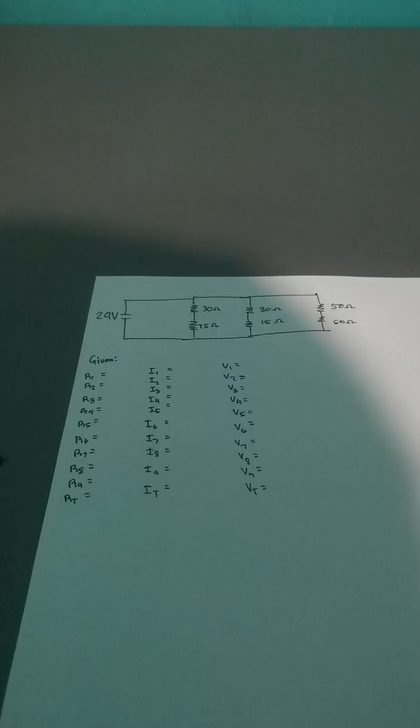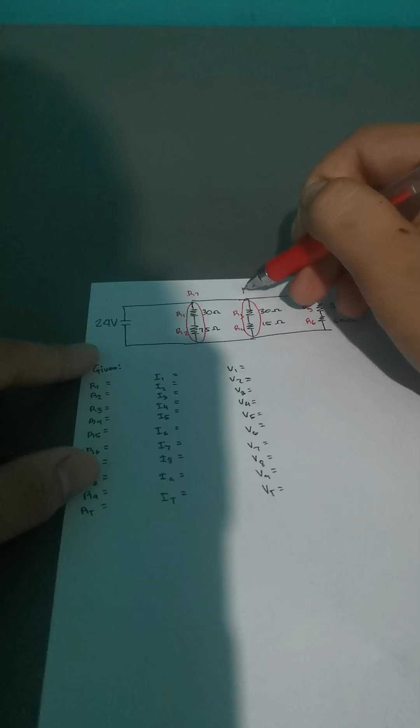Okay, so subong ma-solve the series parallel ng circuit. Pero ang given tanan is resistance. So if may encounter mo ni, ano himuon mo? First, i-identify mo anay ang resistors. So this is R sub 1, R sub 2, R sub 3, R sub 4, R sub 5, and R sub 6. Pero, ang amo niyo is R sub 7, R sub 8, and R sub 9.

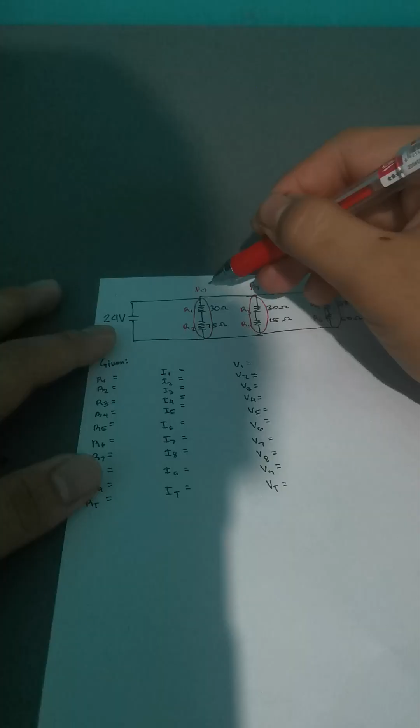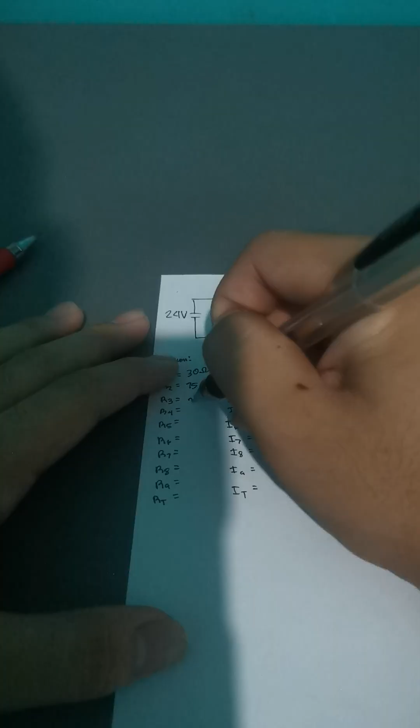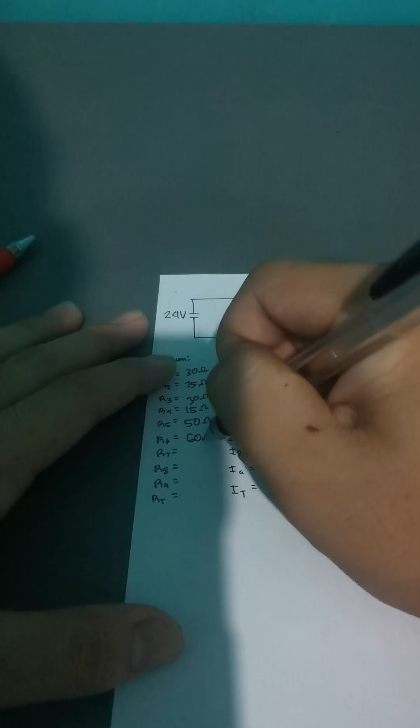So, wala ni kat-kat, diretso lang yun eh. So, consider mo ni sila resistors. Kay ang resistor 1 kag resistor 2 ara sa resistor 7. So, isa na yung given. R sub 1 is 30 ohms. R sub 2 is 75 ohms. R sub 3 is 30 ohms, R sub 4 is 15 ohms. R sub 5 is 50 ohms. R sub 6 is 60 ohms. So, isolve ta ni ang R sub 7, R sub 8, and R sub 9.

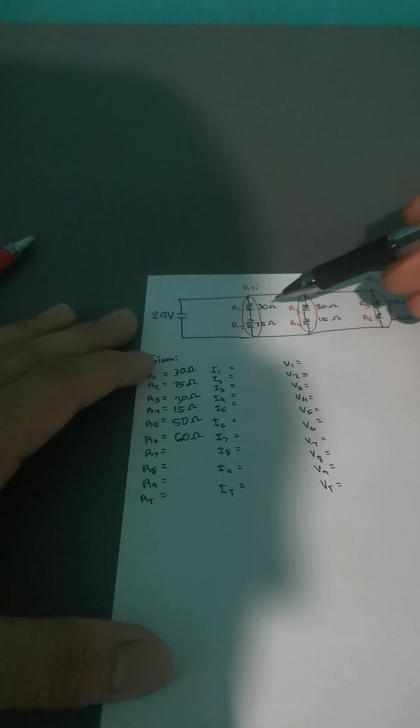So, paano ito na-isolve? Isolve ta kay series parallel circuit ni sa. So, in respect to each other, series ni sila. Pero, in respect to R sub 1 and R sub 2, you can consider this a series circuit. But in respect to R sub 1 and R sub 3, you can consider them parallel to each other. So, isolve ta sila anay.

So, resistance. Oh my gosh, wala. Spelling. Tulo ko sa camera. Okay.

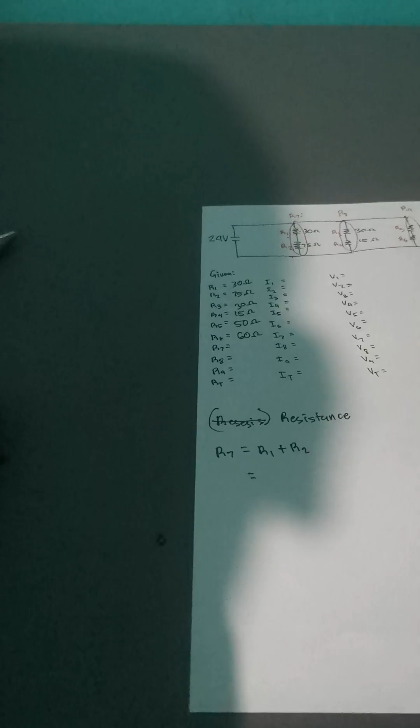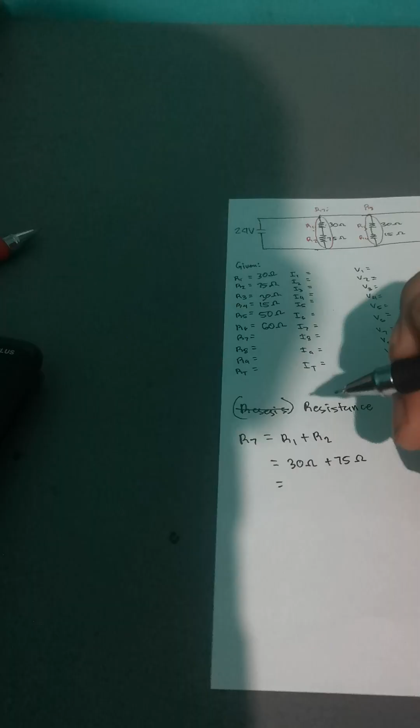So, let's solve for R sub 7. R sub 7 is R sub 1 plus R sub 2. Amo lang gina kung paano mo i-solve. So, 30 ohms plus 75 ohms. That will give you 105 ohms. R sub 7 is 105 ohms.

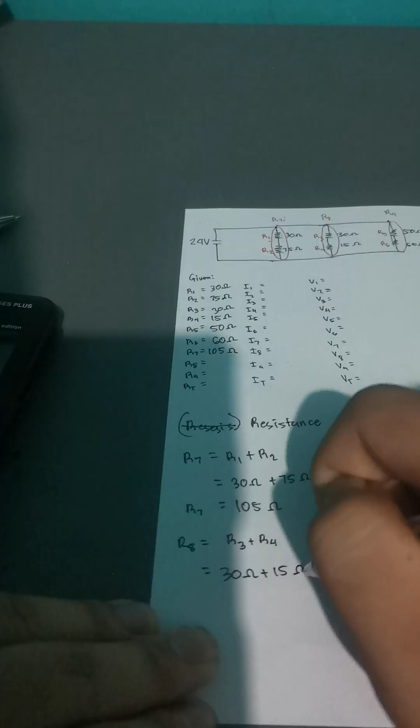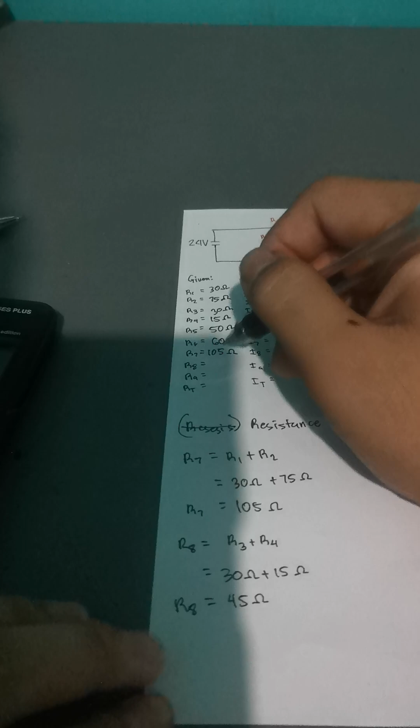Now, let's proceed to R sub 8. R sub 8 consists of R sub 3 and R sub 4. So, R sub 3 plus R sub 4 is equals to 30 ohms plus 15 ohms. That will give you 45 ohms. So, R sub 8 is 45 ohms.

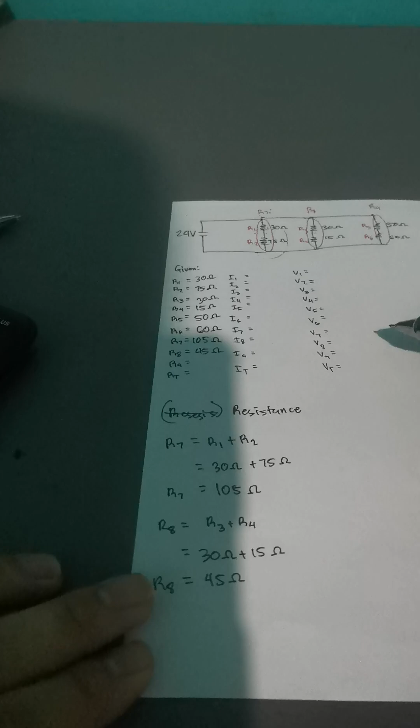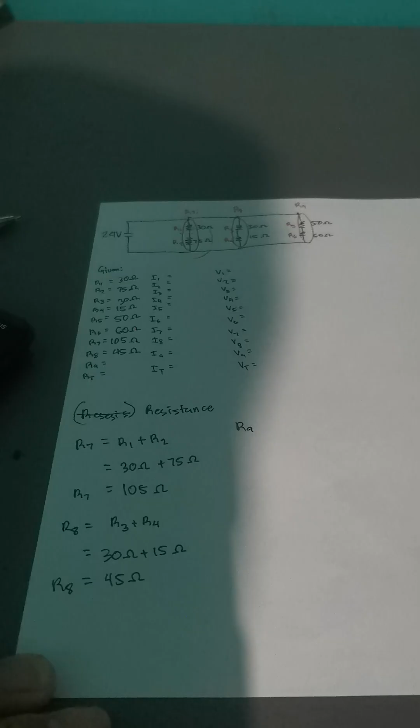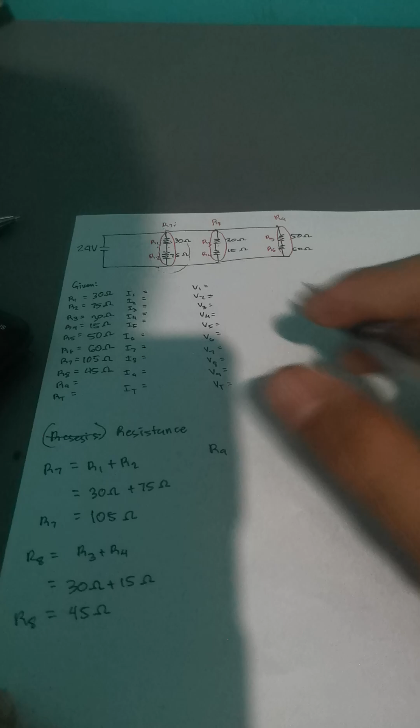Let's proceed to R sub 9. If given, syempre ang resistance, masolve tas ang resistance first. Pero, para better intindihan mo gid if ano ang kulang, ibutang mo na yung given. Depende if ano ibutang, either voltage, current, or resistance. So, in this case, resistance na lang ang given. So, resistance man isolve mo.

So, R sub 9 is equals to R sub 5 plus R sub 6. R sub 5 is 50 ohms. R sub 6 is 60 ohms. That will give you 110 ohms. R sub 9 is 110 ohms. So, after ni, masolve ta for total resistance.

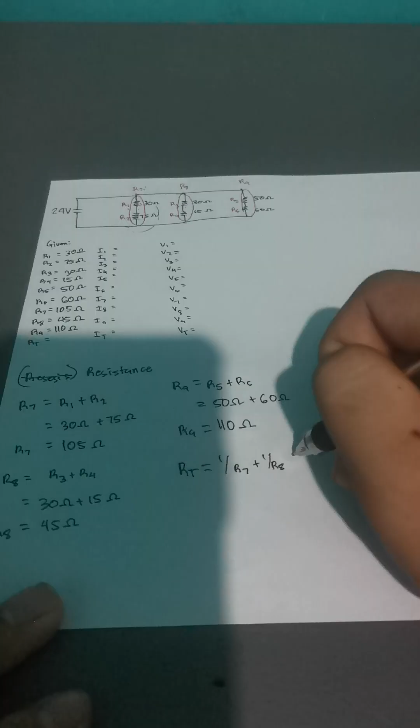So, 1 over R sub 7 plus 1 over R sub 8 plus 1 over R sub 9. Amo malang ni need mo i-solve. Kay, for example, R sub 1 and R sub 2 will make up resistor 7. So, resistor 7, resistor 8, resistor 9. Hindi mo na pag-ibutang nga 1 over R sub 1 plus 1 over R sub 2. No need na magbutang. Like, 1 over R sub 7.

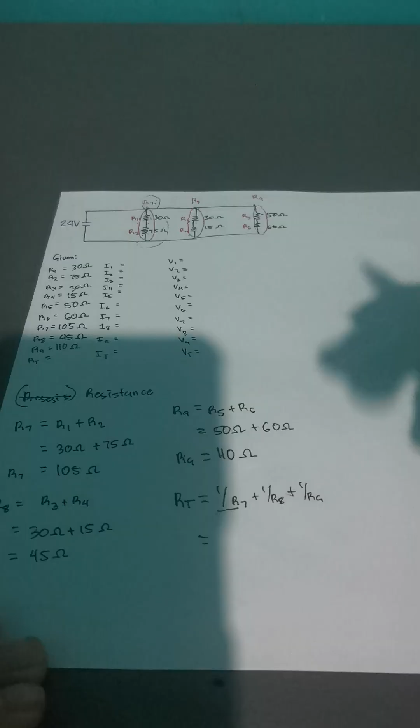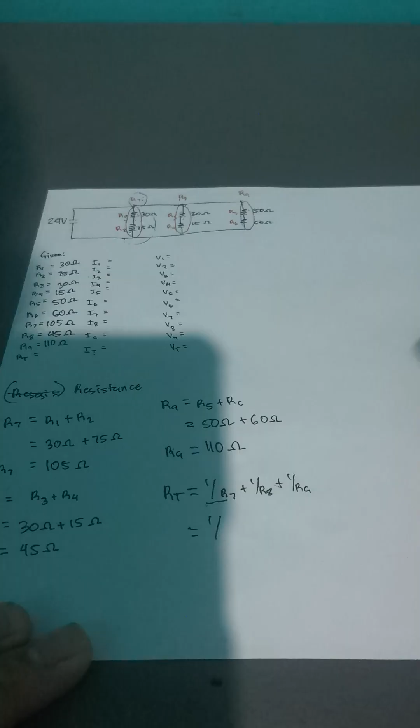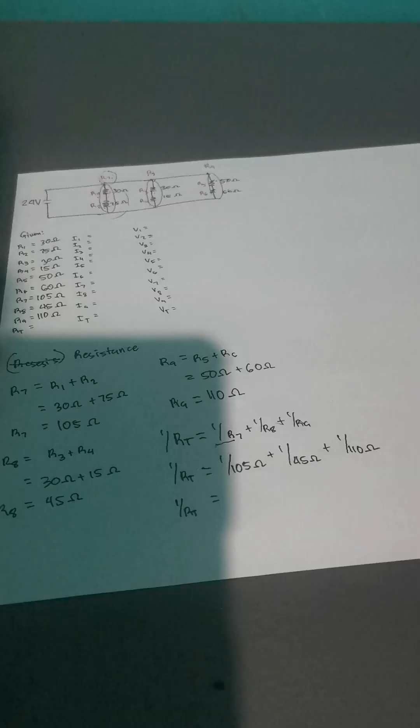Okay, so 1 over R sub 7, 105 ohms, plus 1 over R sub 8, 45 ohms, plus 1 over R sub 9, 110 ohms. So 1 divided by 105 is 9.5 times 10 raised to the power of negative 3. Ma-move ka 3 spaces to the left. So 0.009.

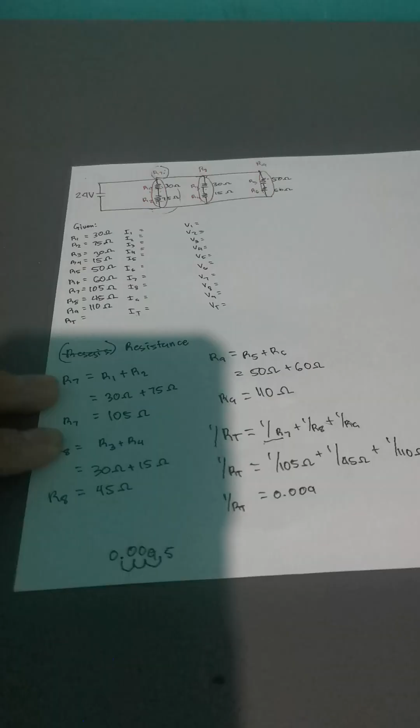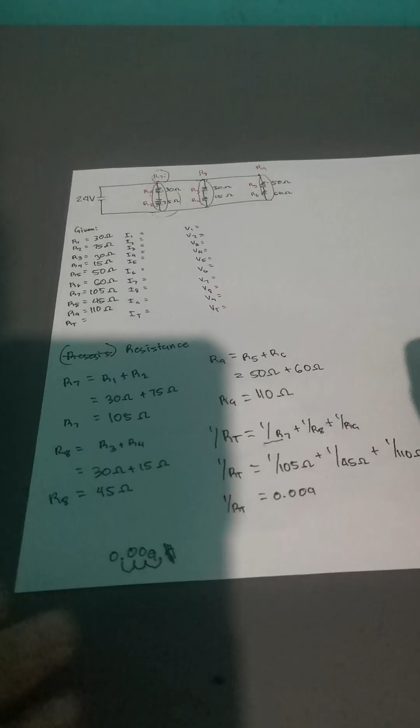Wala na ng 5, i-discard na. Sorry. Sorry, may 5 pa na di. Oh, wait. Yeah. I know.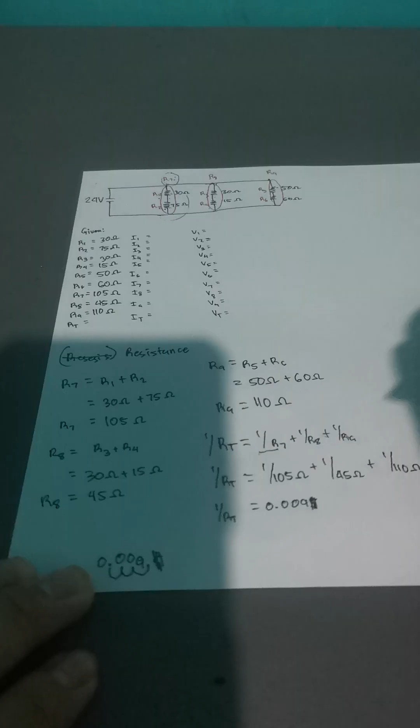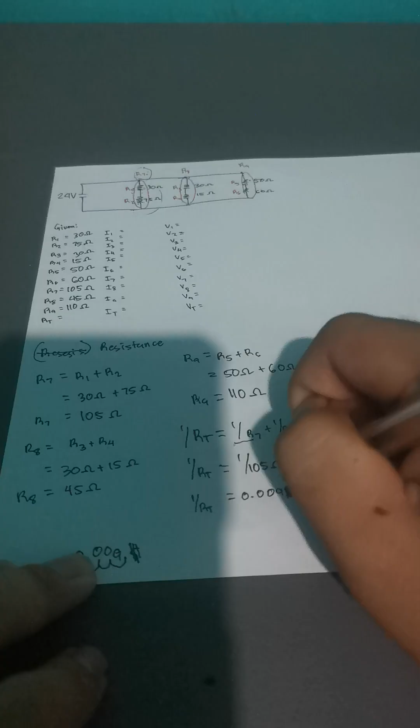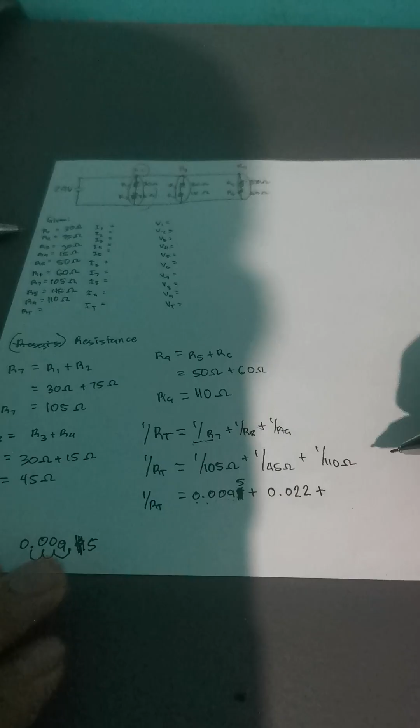So, plus 1 divided by 45. That will give you 0.022. Oh yeah, may 5, so 0.0095. Then there is 0.022, plus 1 divided by 110. That will give us 0.009. Ma-round up ta kay 9 ang tupad ya. So 0.0091. Siyempre butang ta unit which is ohms.

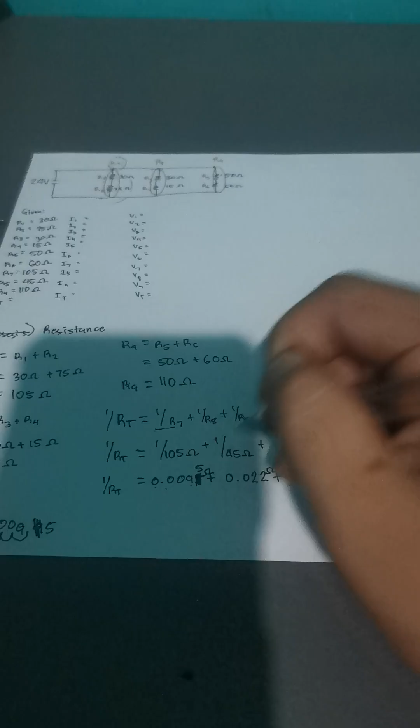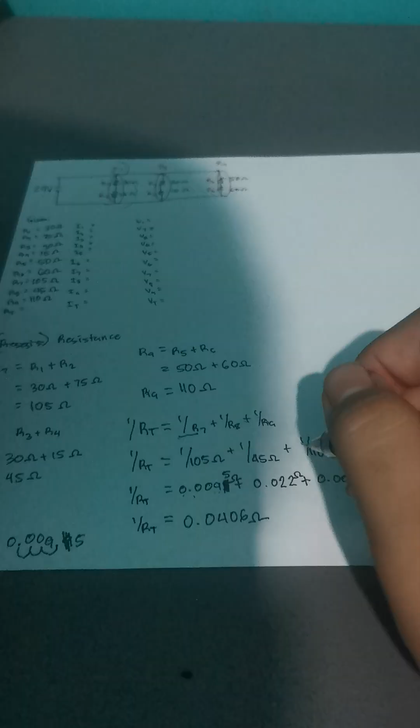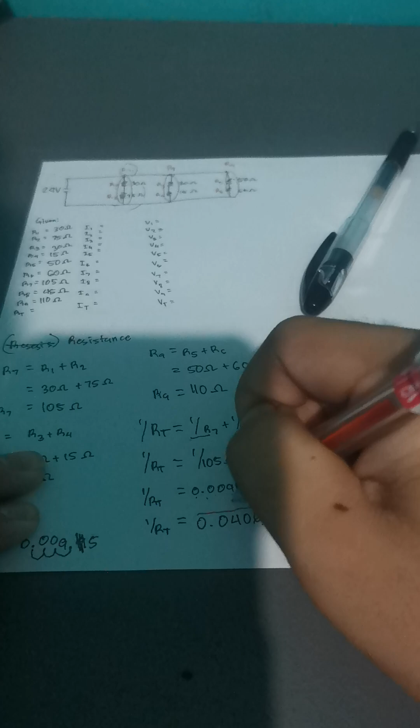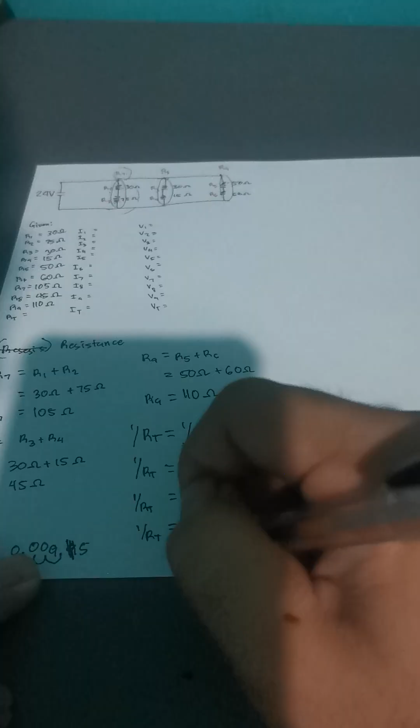I-add ta na. So, 0.0095 plus 0.022 plus 0.0091. That will give us 0.0406 ohms. Pero wala pa tapos because may 1 pa. Ang gusto ta mabilin is R sub T. So 1 divided by 0.0406, that will give you 24.63 ohms. So your total resistance is 24.63 ohms.

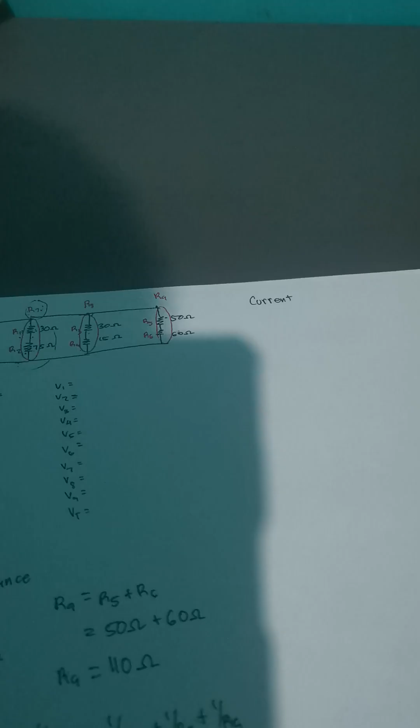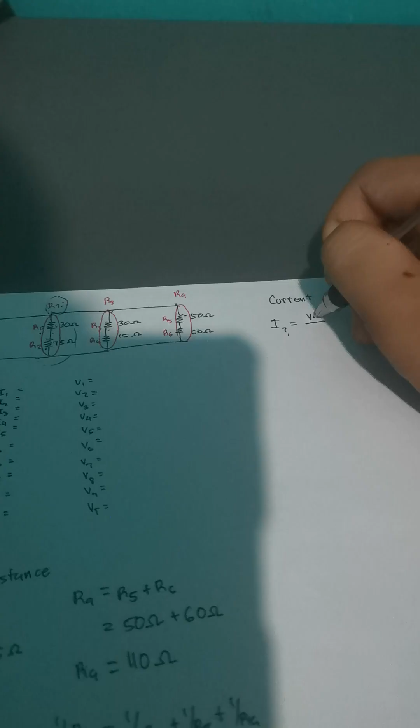So, ano na din ang i-solve ta? So, ma-solve ta for current. Paano ta ni sa himuon? Ohm's law. Pero, solion ta. Ang ginapangita ta, diba, is current. So, for example, ginapangita tang I sub 7. So, I sub 7 is equals to V sub 7 divided by R sub 7.

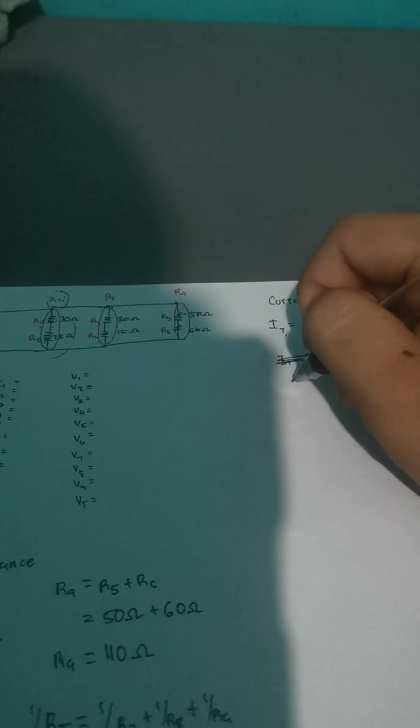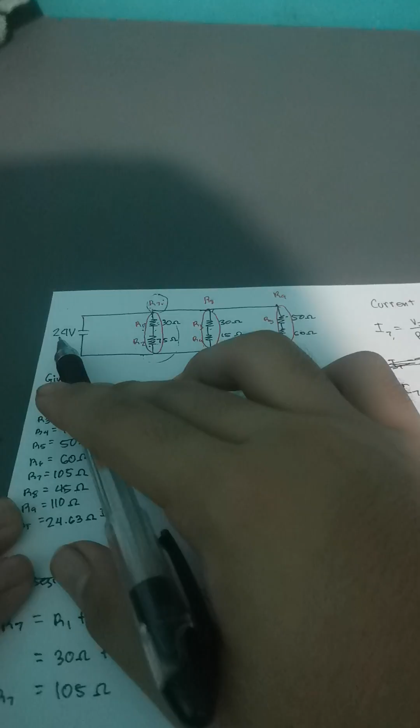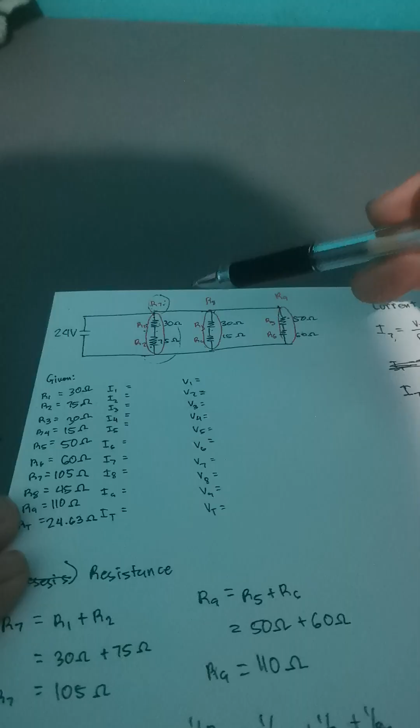I sub 7, pila ang resistance? 105 ohms. Okay, we start tayo. R sub 7 is 105 ohms. Ang voltage naman ni V sub 7 is ang total voltage mo. Because a parallel circuit is a current divider. So, the voltage will remain the same throughout the resistors. So, R sub 7, 24 volts, R sub 8, 24 volts, R sub 9, 24 volts also. Same lang sila voltage because ang parallel circuit is a current divider, not a voltage divider.

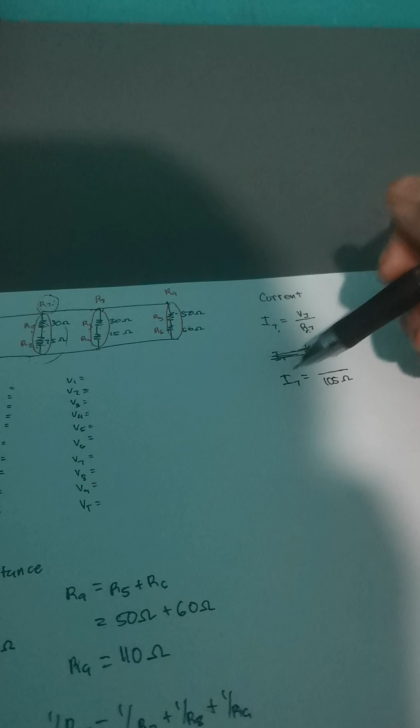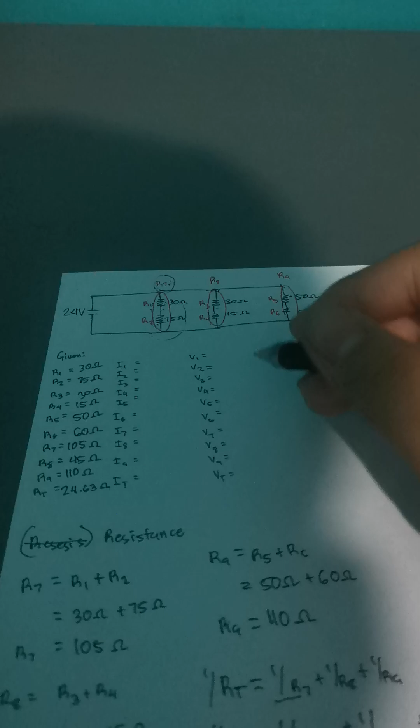So, V sub 7 is 24 volts. Divide na lang. 24 divided by 105. That will give you 0.22. Actually, 0.228. So, ma-round up ta. 0.23 amperes. Solve na ang I sub 7. So, I sub 7 is 0.23 amperes.

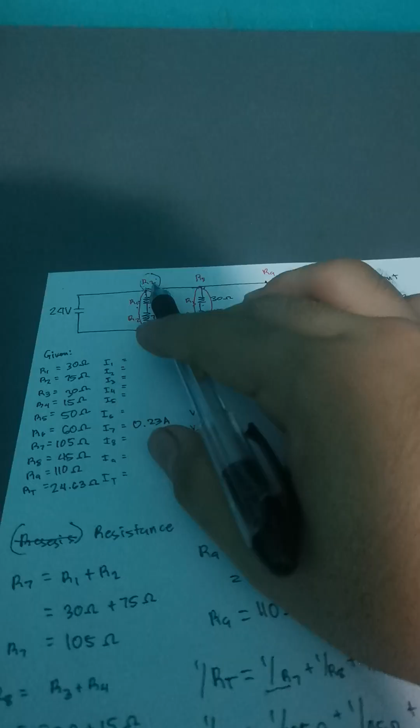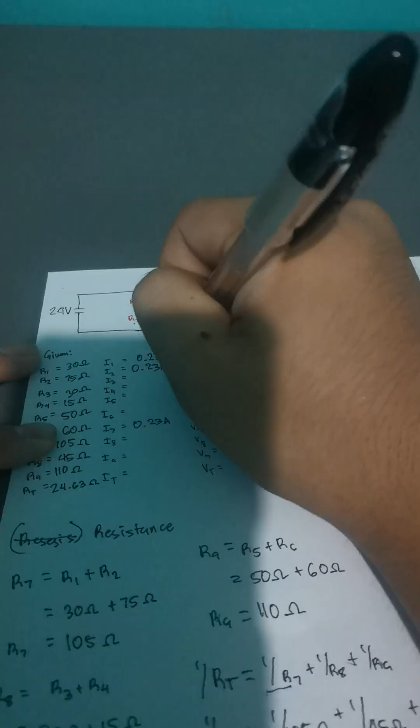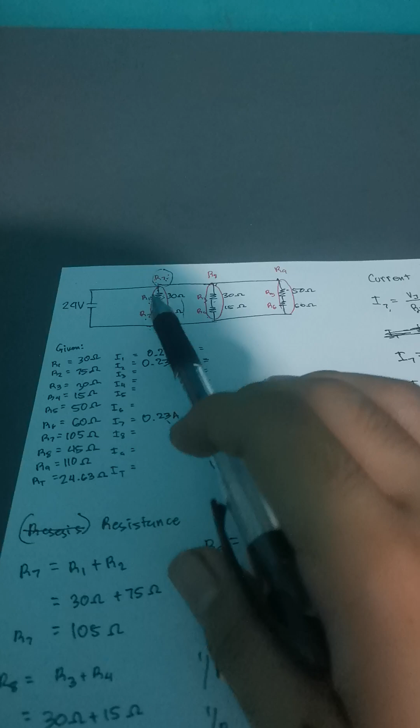Since ang R sub 7 consists of R sub 1 and R sub 2, automatically, ang current ni I sub 7, same na kay I sub 1 at I sub 2. Because resistor 1 and resistor 2 make up resistor 7. So, automatically, they share the same current with each other. So, I sub 7 is 0.23 amperes, I sub 1 is 0.23 amperes and I sub 2 is 0.23 amperes also. Because, as I said, R sub 7 consists of R sub 1 and R sub 2. So, same na sila current.

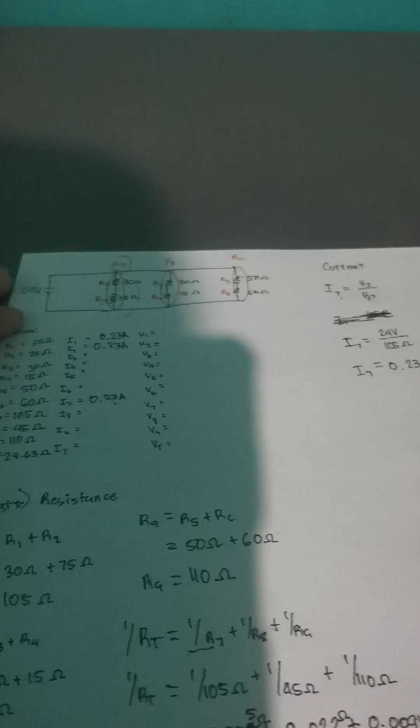So, ma-solve naman ta for I sub 8. Ang current ni I sub 8, automatically, same kay I sub 3 and I sub 4. So, I sub 8 is equals to V sub 8 over R sub 8. V sub 8 is 24 volts because the voltage per resistor is the same with the total voltage. So 24 volts divided by R sub 8. R sub 8 is 45 ohms. So 24 divided by 45, that will give you 0.53 amperes.

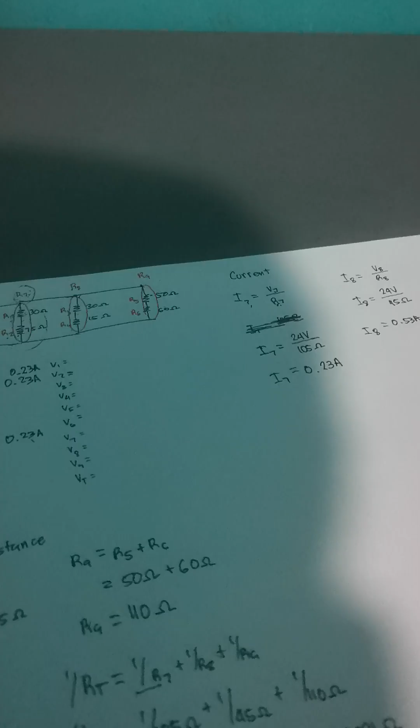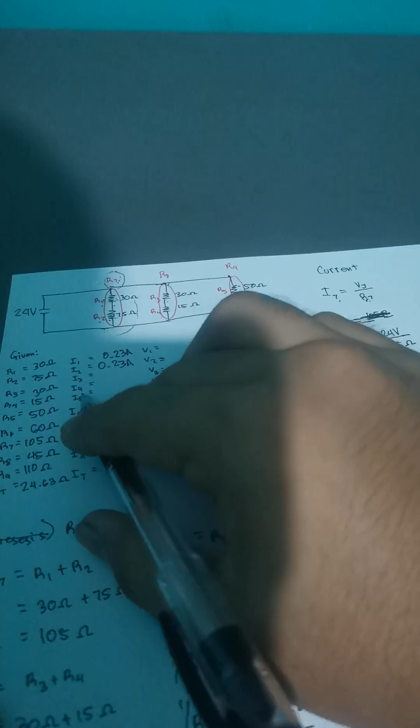So, okay, let's move on to I sub 9. Ibutang ta na. I sub 8 is 0.53 amperes. Automatically, ang I sub 3 and I sub 4 is 0.53 amperes also.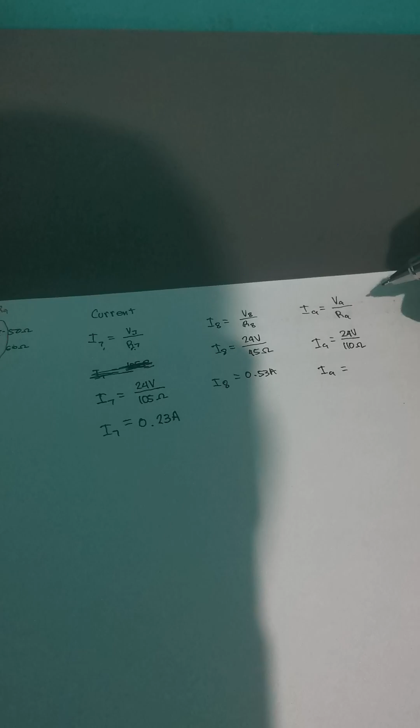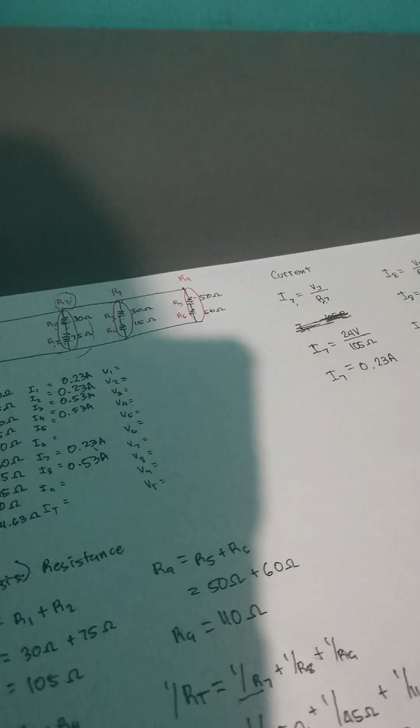So let's move on to I sub 9. I sub 9 is equals to V sub 9 over R sub 9. V sub 9 is 24 volts. R sub 9 is 110 ohms. Divide na lang. 24 divided by 110. That will give you 0.22 amperes. Ma-round up ta. So I sub 9 is 0.22 amperes. Automatically, I sub 5 and I sub 6, same lang sila sa current ni I sub 9: 0.22 amperes and 0.22 amperes.

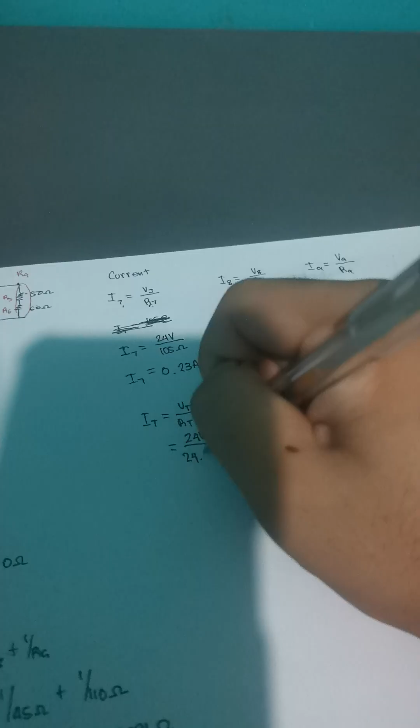So, ma-solve ta for the total current. I sub T is equals to V sub T over R sub T. Di ba may total voltage at total resistance, total current na lang ang kulang. So, amo na i-solve ta. 24 volts, amo na ang total voltage ta. While our total resistance is 24.63 ohms. Divide na lang. 24 divided by 24.63. So, your total current is 0.97 amperes. So, we add ta.

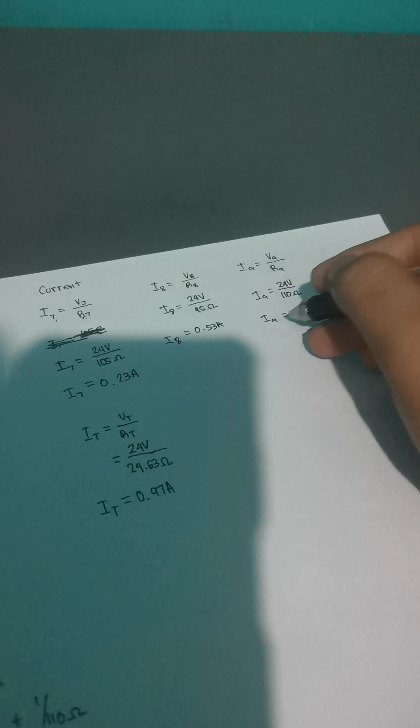Current 7 is 0.23 plus current 8, 0.53, plus current 9 is 0.22. That will give you 0.98. Okay lang if ma-decrease by 1 or ma-increase by 1 because may slight margin of error ta. Ang margin of error naga-base sa pag-round up mo or round off. So, tsakto kay fit sa margin of error nga increase or decrease by 1.

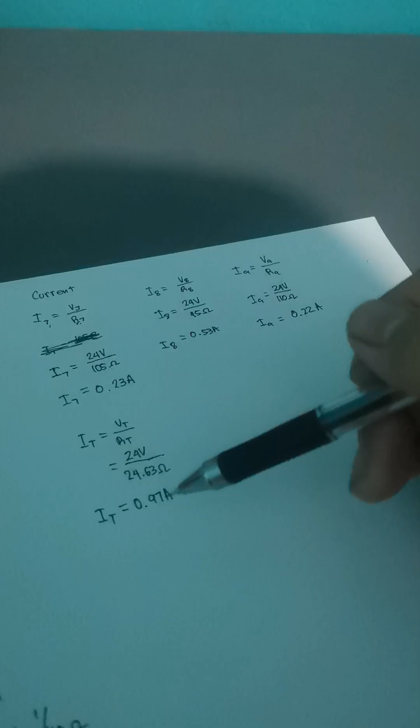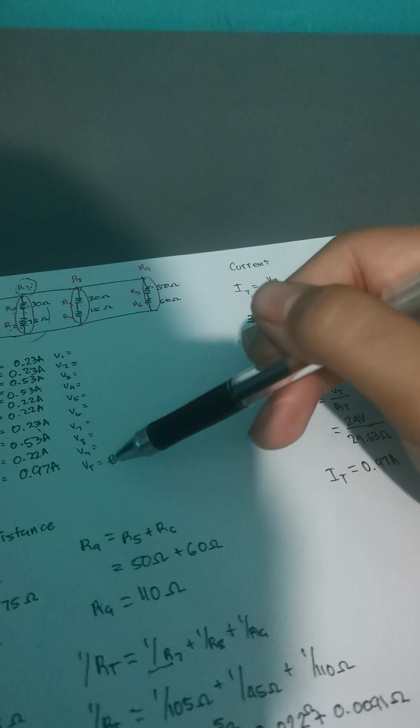Okay, so let's move on to voltage. Our total voltage is 24 volts. As I said, a parallel circuit shares the same voltage with all of the resistors. So, ang total voltage mo same lang sa voltage ka resistor 7, resistor 8, and resistor 9. So, no need na mag-solve. Resistor 7 up to 9 is 24 volts.

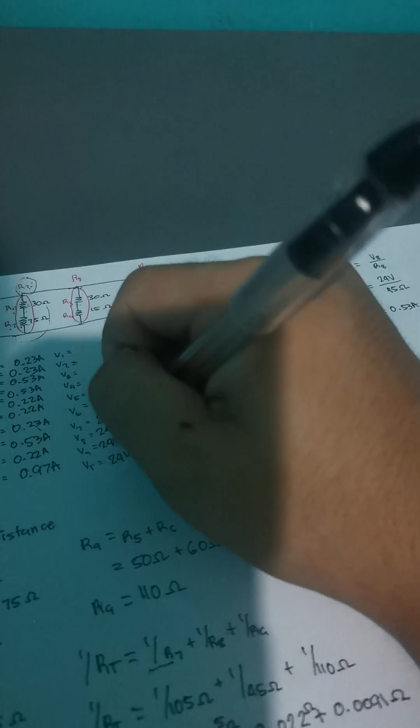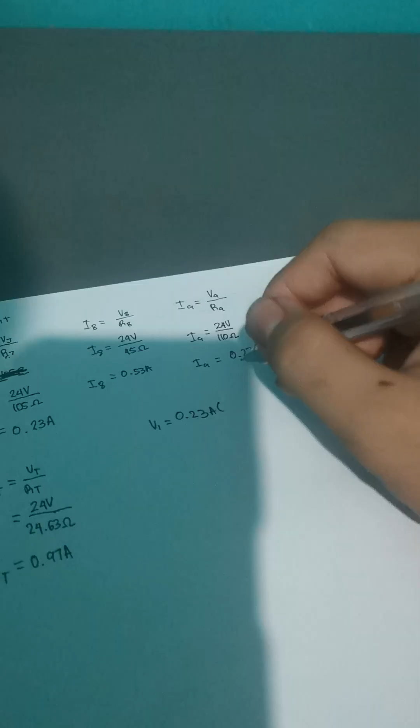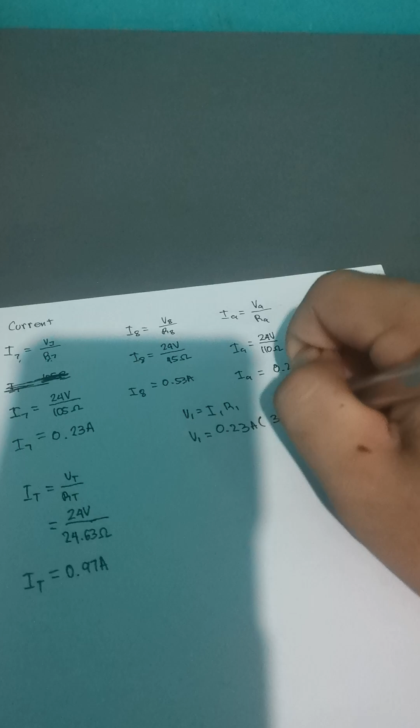So, ma-solve na ta for V sub 1 to V sub 6. V sub 1 is equals to, V equals IR, Ohm's law. So, ang I sub 1 is 0.23 amperes. Multiply lang by ang R sub 1; ibutang ko ang formula para makita gid. Okay. So ang R sub 1 ta is 30 ohms. Multiply ta lang dayon. 0.23 multiplied by 30, that will give you 6.9 volts. V sub 1 is 6.9 volts.

So V sub 2 naman ta. V sub 2 is I sub 2 multiplied by R sub 2. Ang I sub 2 ta is 0.23 ampere still, while ang R sub 2 ta is 75 ohms. So, 0.23 times 75. That will give you 17.25 volts. So, if i-add na ni sila, 17.25 plus 6.9, that will give you 24.15 volts. So, tsakto ang pagsuma ta ka voltage nila.

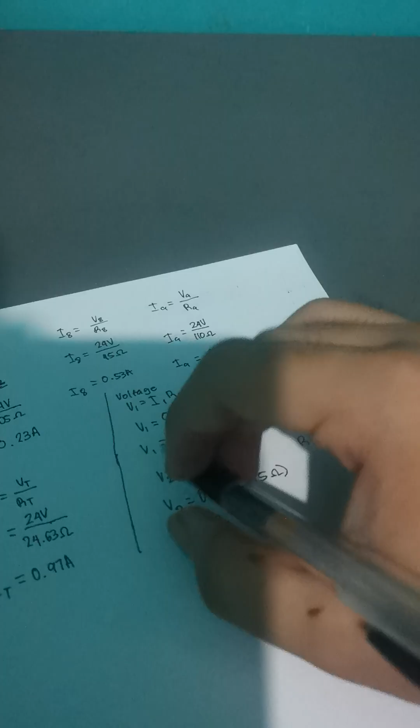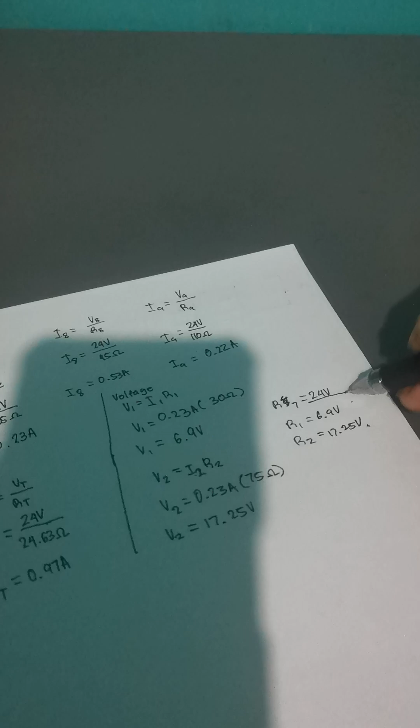Kay V sub 7, di ba, 24 volts. So, ang unod sang R sub 7 is 24 volts. Ang nagakonsist sang R sub 7 is R sub 1 and R sub 2, di ba? So, ang voltage ka R sub 1 ta is 6.9 volts and R sub 2 ta is 17.25 volts. If i-add na sila, magwa na 24.15. Dapat gamatch sa total voltage. So, padayon mo lang na-solve.

Then, what's important is tupong mo sa total voltage. Always remember nga may margin of error ta. Ang margin of error ta is either ga-increase by 1 or ga-decrease by 1.